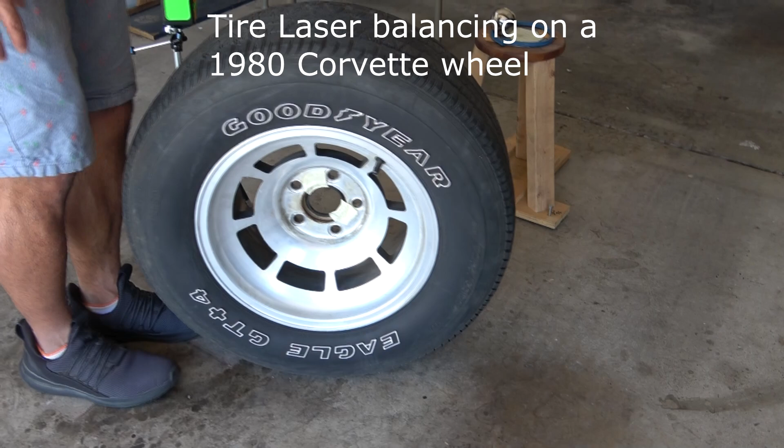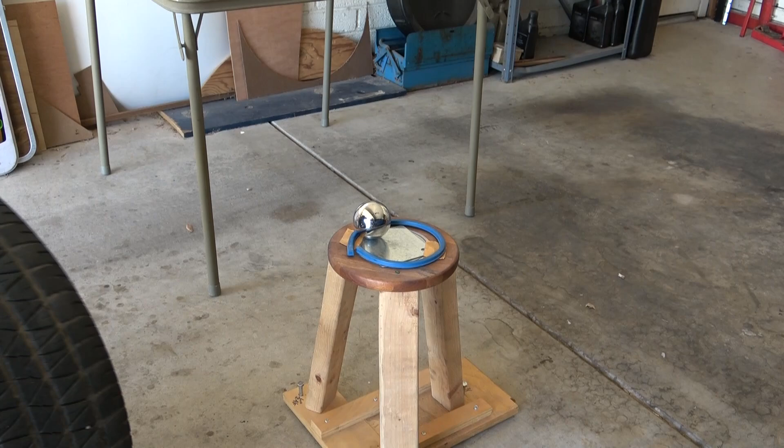Right, so we're going to put the wheel, this is the Corvette wheel, we're going to put the Corvette wheel on the balancer, the ball balancer, and show that it doesn't work. It just has something to show.

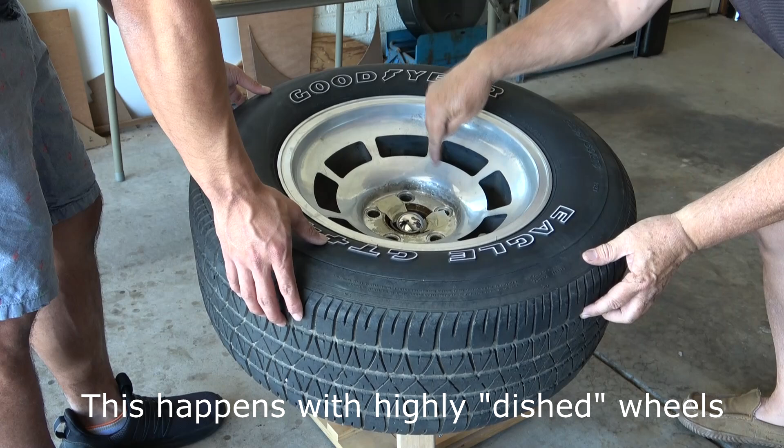Alright, now we can't let it go because it's going to fall. And the reason it's going to do that is this area is too far that way. So the center of gravity of the wheel is above the centroid, that's the middle of the ball. And when it does that, it's a self-perpetuating fall, so the further it tips, the worse it gets.

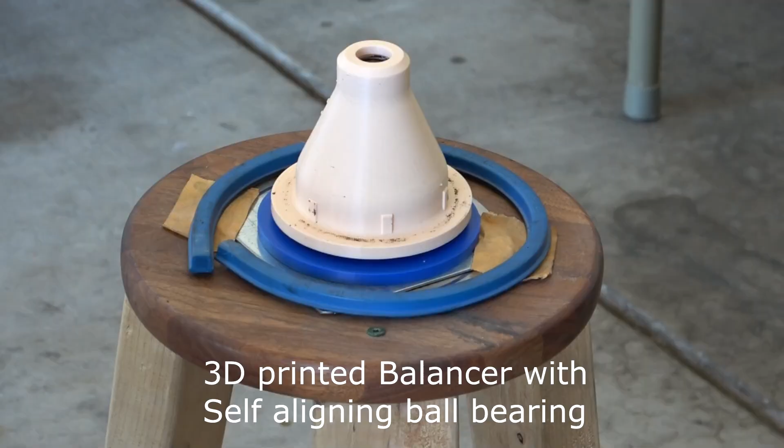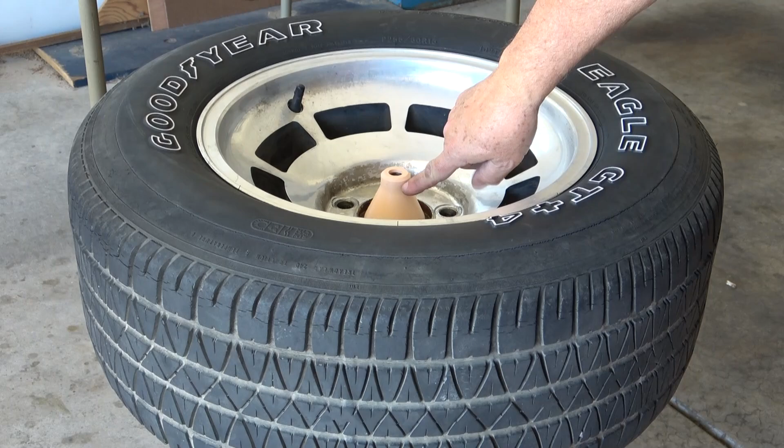Okay, take that off. Thank you. Okay, so now we're going to try the wheel on top of the printed part I've made up. And yes, it balances because the part where it pivots is now up here, so it's above the center of gravity. So with this on there, we might be able to do a balance.

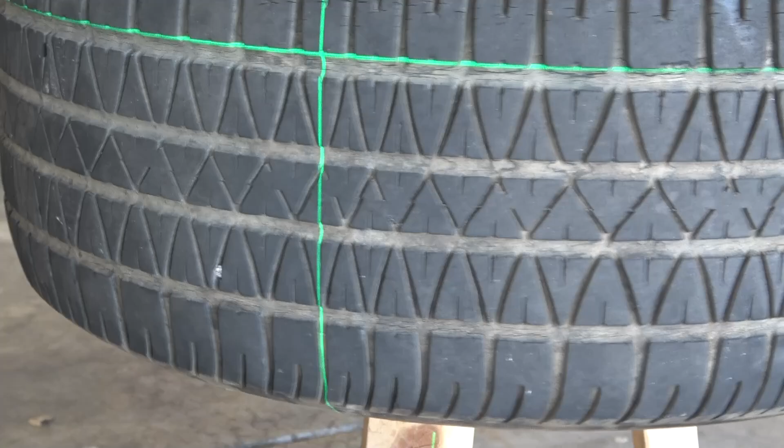So with the wheel spinning, it's staying fairly level with that self-aligning ball in there. But as it spins, you can see the laser line is dropping down towards the lower tread. And then as it goes around, it will come back up. So hopefully, see, it's coming back up now. It's getting over, touching that top tread. And that's how we can do it.

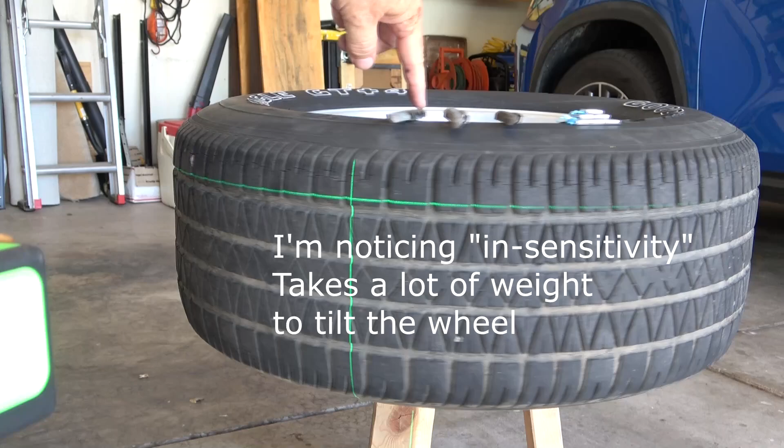So about where it says, near where the valve is, on the other side, I need to put some balance weights. Let's give it a try. I'm doing an experiment here just to see how sensitive it is. So I put a bunch of these lead weights on, and it hasn't moved the line a lot. Here we are opposite the lead weights. Now we're coming back up to the lead weights. Right there. So it does move.

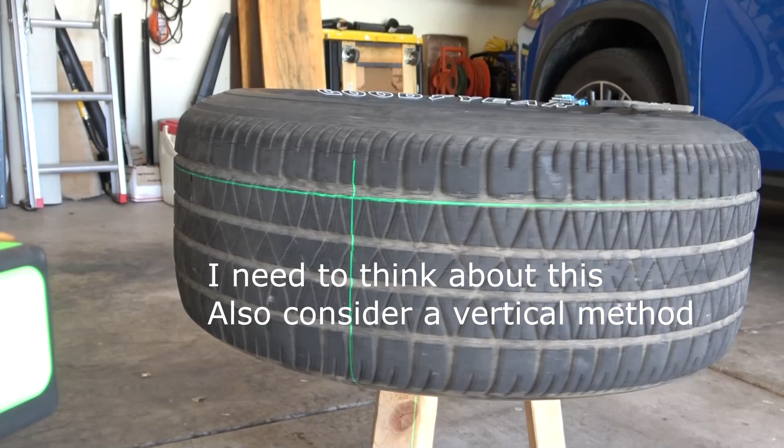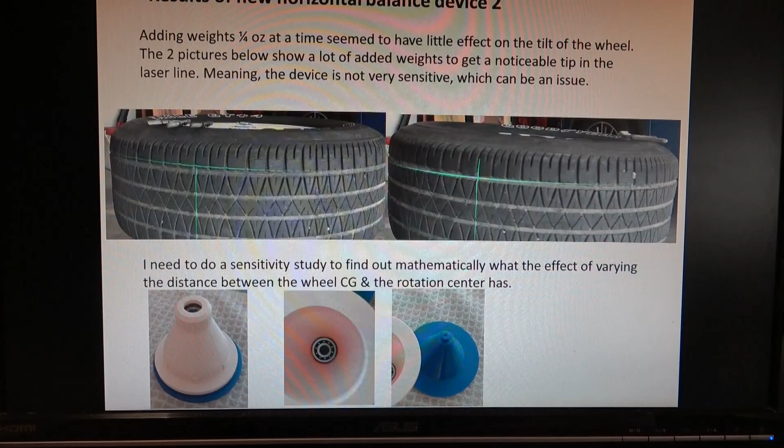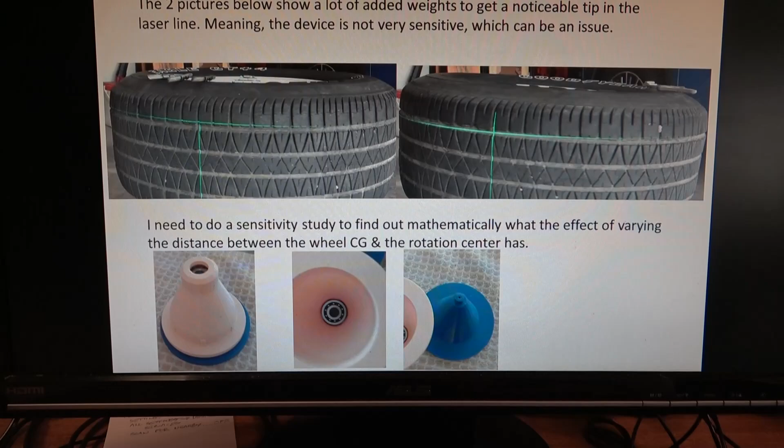I'm going to go ahead and do a second method as well. I think I can do a vertical one too. Yeah, adding a bunch of weight made me think about this. So I've written my ideas down in this PowerPoint. You can see the balancer I had underneath with the self-aligning ball bearing in there. It's a great concept, but I think it needs improving because adding that much weight is just not good.

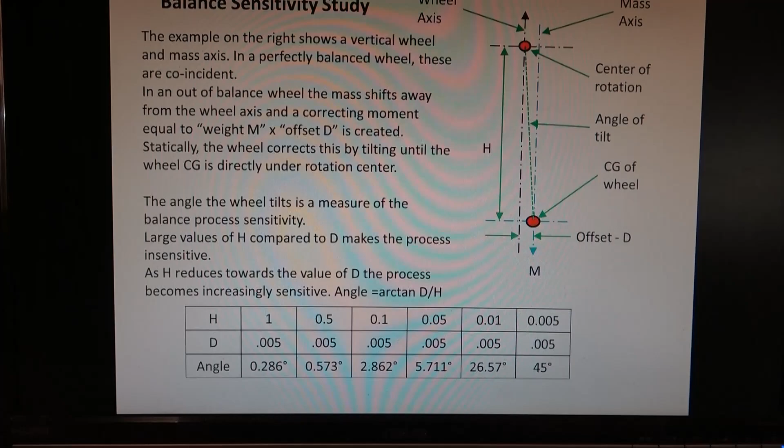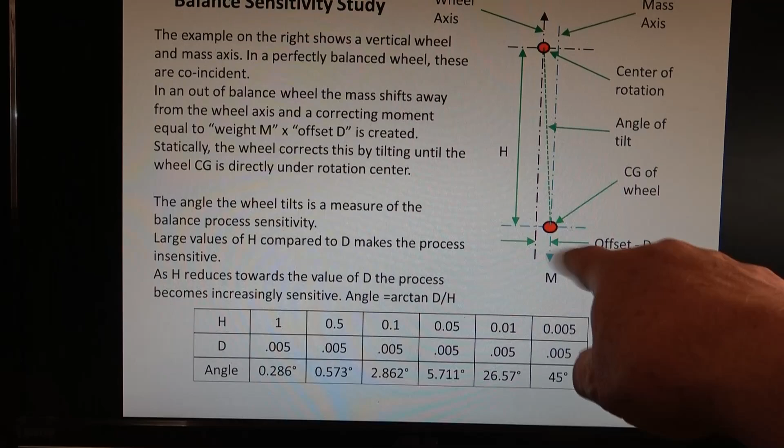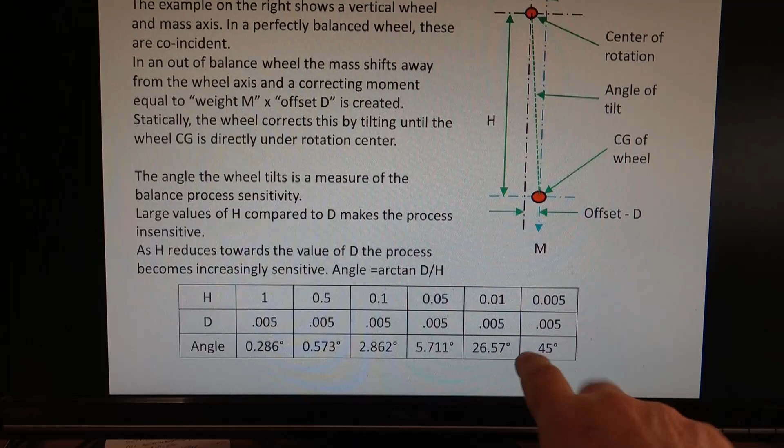So I had to look at the theory behind it. Yes, I know, it's a lot to take in, isn't it? You can pause to read it. Basically, this distance h compared to how much the weight is off changes the angle of tilt as it gets smaller and smaller. And the smaller it gets, the more it'll tilt. So that's the sensitivity. So I'm working on a shorter pink adapter piece.

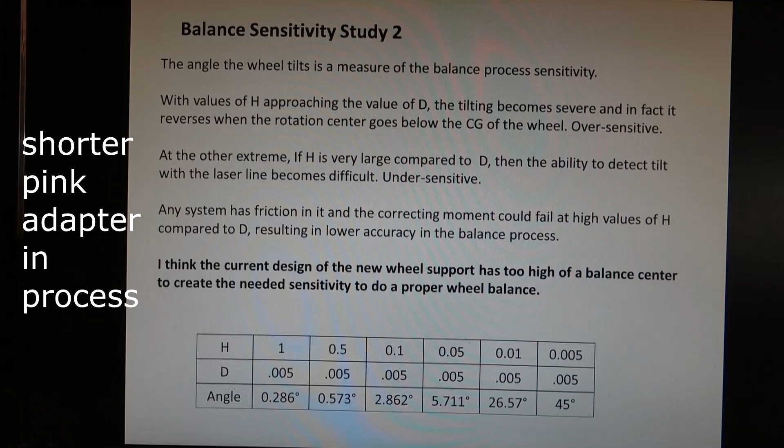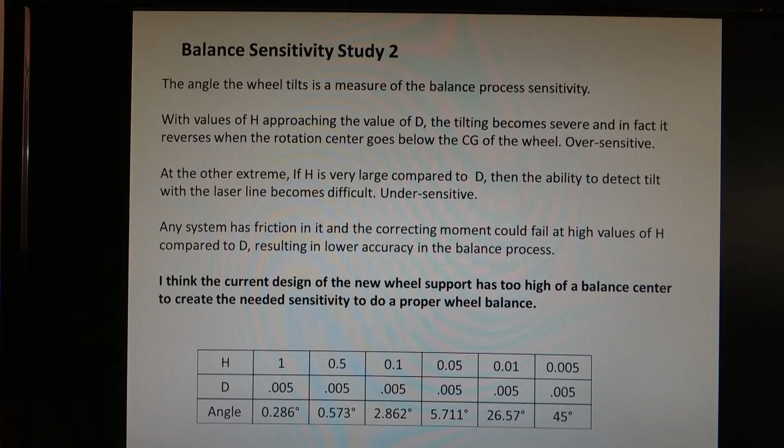That piece was kind of pinkish, wasn't it? So I'm working on a shorter adapter. You can test that. I'm also working on turning the wheel vertically using 3D printed parts to support it, because that plastic's pretty stiff. It can probably do it. I've got an idea, I'm working on it. That would be my backup plan if this one fails.